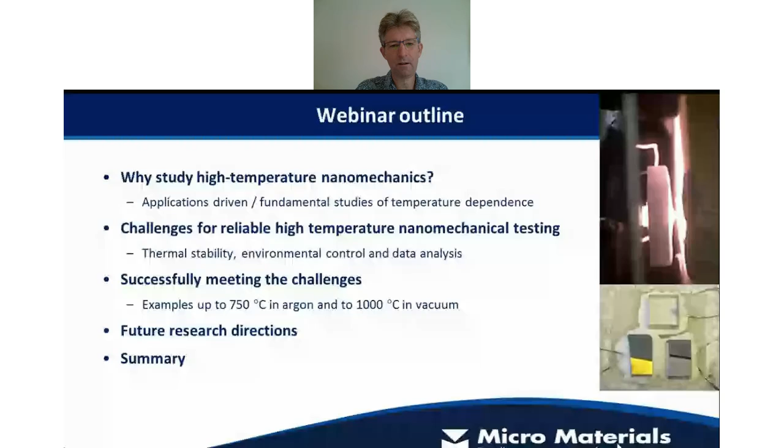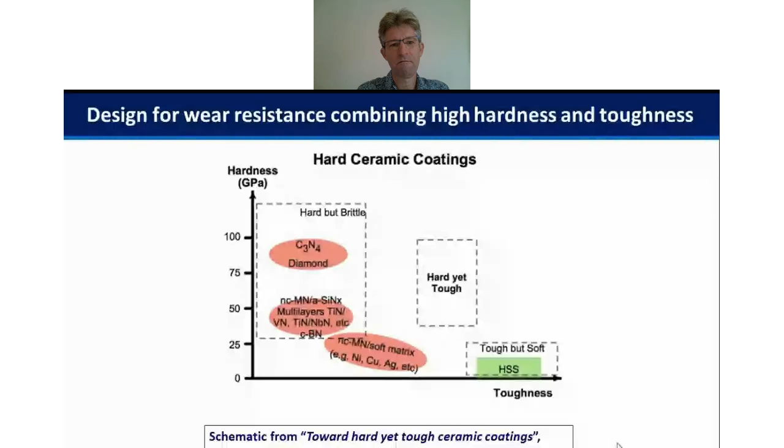This is a schematic, but really, if you think of many applications of these hard ceramic coatings that Sam is thinking about, this is only part of the solution. What we need in these applications is a combination of high temperature hardness and high temperature toughness, which achieves longer life of the coated systems.

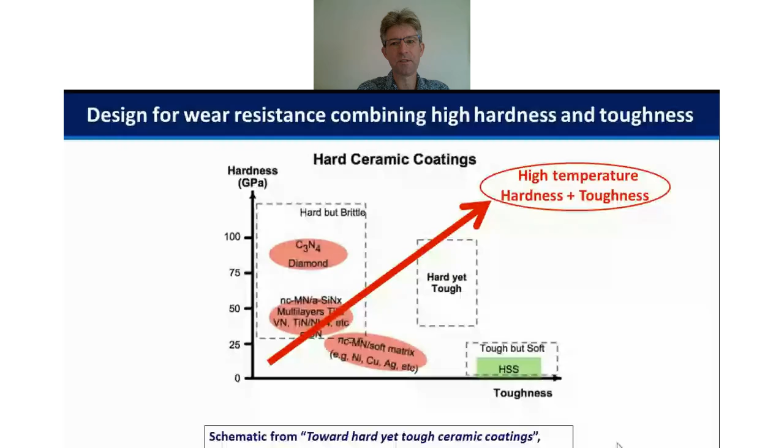A lot of our research revolves around evaluating materials for these extreme conditions. If we think about one particular high temperature application, that is high speed metal cutting, friction is generated during the high speed cutting. So the question might be, how high, what sort of temperatures do you reach?

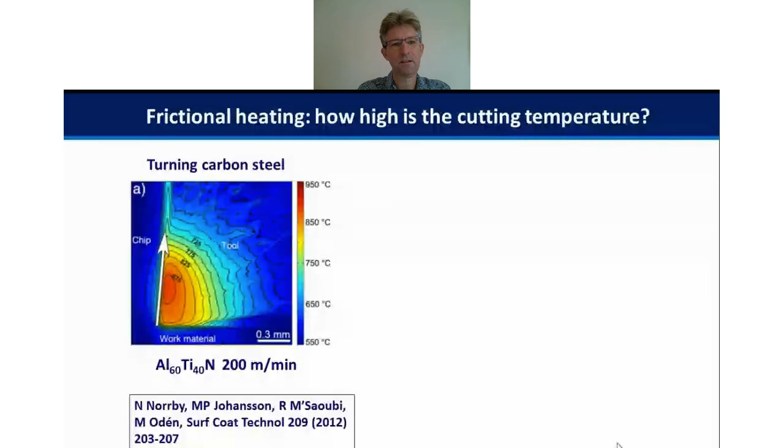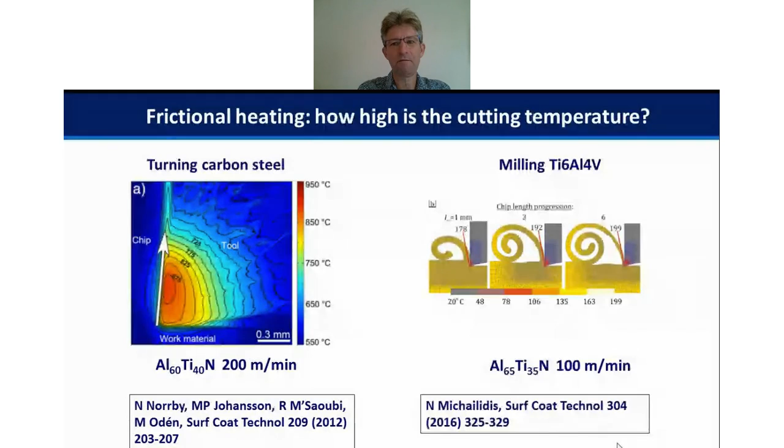If you do a continuous turning operation on a carbon steel, as in this piece of work here, thermal image from Linköping, you can see that you actually achieve very high temperatures around 900 degrees right near the cutting edge in this example. If you have a discontinuous cutting operation, in this case milling of a titanium 6-4 alloy, the temperatures are rather lower, but nevertheless very much higher than room temperature testing.

If we're trying to optimize coating performance for a longer life in these type of cutting tests, the question might be, how relevant are room temperature tests? It's generally assumed that if a coating is hard at room temperature, it stays harder than another coating at high temperatures.

I should also say that in all the graphs that follow, when I put temperature on the x-axis, this really means test temperature. This is not the question of heating the sample up and then cooling it back down and remeasuring after an annealing temperature - this is the temperature we do the test at.

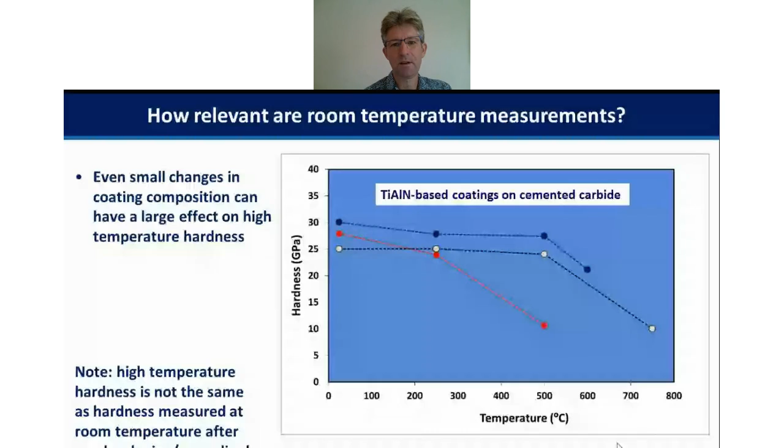So this is a good example here that typically you anneal things to make them harder, but actually when you test them at temperature, the hardness still typically drops.

As well as this type of test where you really need to know the high temperature hardness, there's a wealth of other information you can get out of these nanomechanical tests when you have reliable data. You can get, for example, position sensitive local mechanical property data in different phases.

You can also look at time-dependent deformation and look at things like strain rate sensitivity, creep behavior, and how this is affected by the changing plastic deformation mechanisms in your materials, and that may also affect the amount of pile-up that occurs around the indentation.

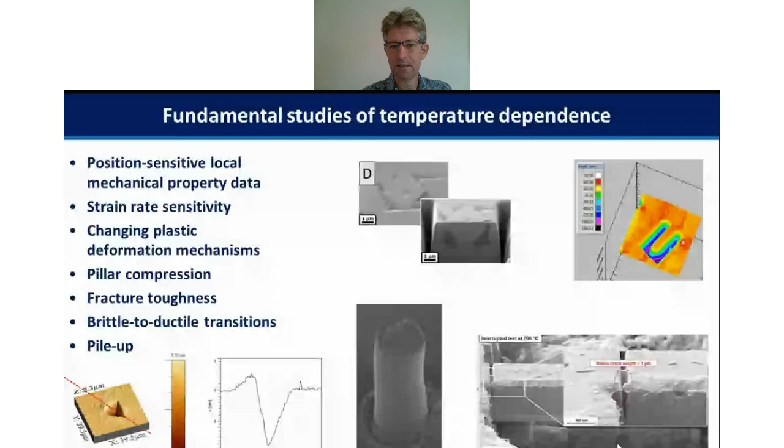You can also look at the ductility of small-scale structures and materials, particularly those that are brittle at room temperature. So you can look at machined pillars, machined micro cantilevers, and I'll talk a little bit about that later on. The examples here are showing silicon cantilevers and silicon pillars, and also a tungsten alloy.

To achieve this very high level of reliable data, you really need to think about three things. Firstly, things around instrumentational stability - the heat, you have to manage the heat flows in the contact generated by the high temperature test.

Make sure that this heat does not reach your measurement electronics and give you some sort of instrument drift for that reason. But equally important, perhaps more important, is that you need to actually control the temperature in the contact to ensure that the probe and the sample are in thermal equilibrium, so that when you do an indentation test, you don't get heat flow as your dominant measurement, so that you actually measure the deformation of the material and not the thermal drift of the contact.

The next set of things you need to worry about are the changing chemical and mechanical properties of the indenter and sample. If you think about the hard indenter material, typically diamond at room temperature, it works really well at high temperature testing up to about 450, maybe 500 degrees, and then it oxidizes in air, putting a pretty hard limit on using diamond above those temperatures. It effectively burns away. You also need to think about chemical reactions between the tip and sample at high temperatures that may not occur at room temperature, and bear that in mind with your indenter choice. You also need to consider the hardness and even the fracture toughness of the indenter material, which again may be very different to what it is at room temperature.

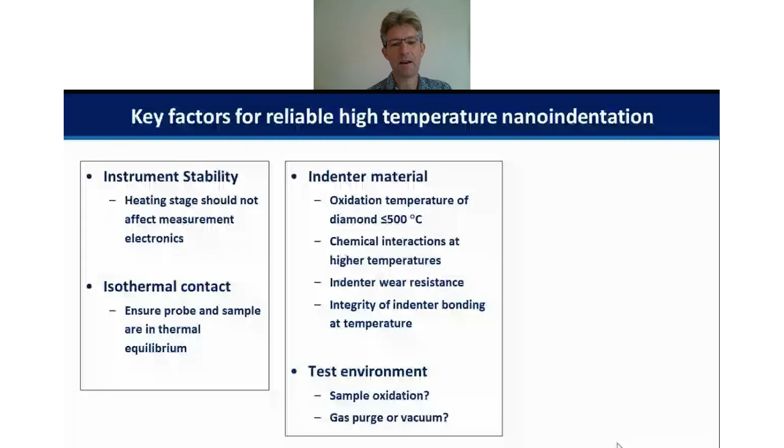You need to make sure the indenter remains well bonded into its holder at high temperature, so you may need to use things such as a very high temperature braze or a glass ceramic bond, as we've done at Micromaterials. Also, the test samples themselves may oxidize, which also impinges on whether you can get away with an argon purge or whether you need to move towards high vacuum.

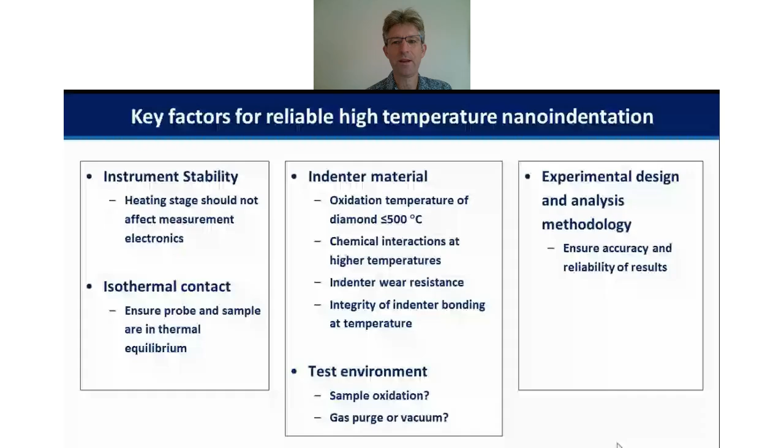The final thing we really need to consider is that in high temperature tests, typically we get a lot more time-dependent deformation, or viscoelastic and viscoplastic deformation, and how we cope with that in the test design and analysis methodology is quite important. I'll give examples of how we can mitigate this to achieve high quality creep data and also high quality elastic modulus data.

Firstly, consider what might happen if we simply have a hot sample and indent it - we might get heat flow. One approach people have looked at is putting the indenter in contact with the sample, leaving it for a certain amount of time so it reaches thermal equilibrium, then doing the test. Some manufacturers have gone down this route, but over the years it's become progressively less popular as it's been realized that it's really ineffective, typically in the large majority of situations, particularly for conductive samples.

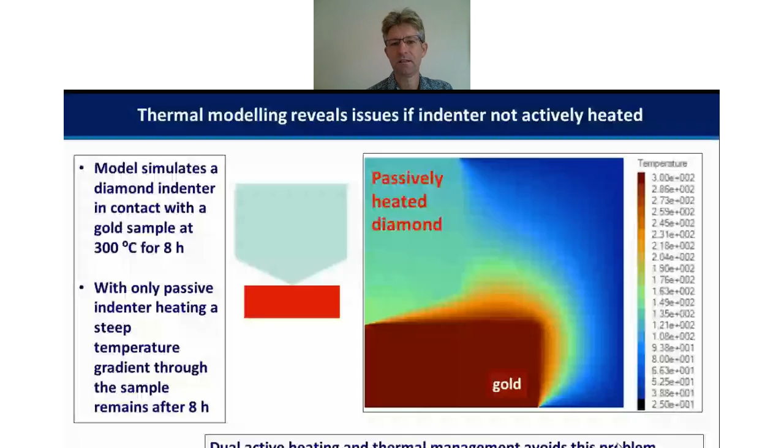The way to avoid it is to actively heat both the tip and the sample, and to precisely make sure those two things are at exactly the same temperature. In the Micromaterials NanoTest system, we achieve that by a combination of things. We have a horizontal loading configuration, which is particularly useful because it allows any heat rising upwards from convection not to reach the displacement measurement electronics. We have separate active heating of the probe and sample, and we've controlled how we thermally match those - we have to handle different thermal masses, with a power lock on the indenter side and a PID loop on the sample side, which stops two PID loops fighting against each other.

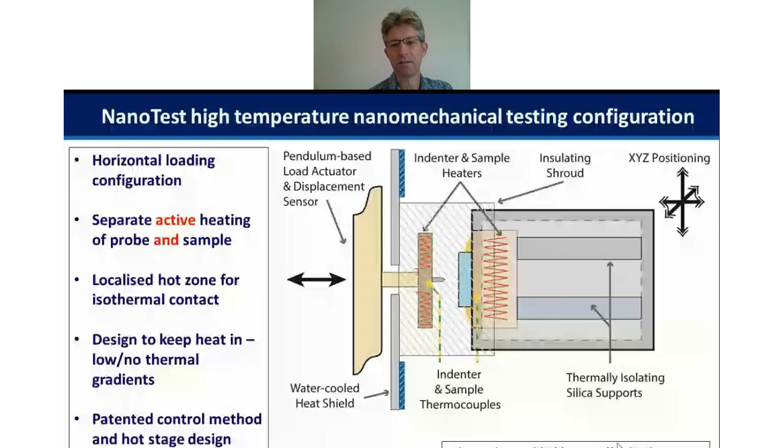We can achieve essentially a very localized hot zone, so if you look at the image where that shroud is, that localized hot zone stays very hot in that area, while outside it, by the shielding and stage design, is essentially much cooler - that's one of the tricks to these measurements. If we look again schematically, if we put a thermocouple on the surface, we can see what the actual test temperature is, and in this example, we've done this in our lab.

We've looked at a test we did at 750 degrees, and we put another thermocouple at the back of the hot stage, and we can see that's about 3 degrees above room temperature, so that's almost exactly the same as room temperature. This is very useful because it means we've really localized that hot zone, and that allows us, amongst other things, to put in an SPM 3D nanopositioning stage, which gives us very fine scale positioning. These things don't like being exposed to high temperatures, but they work quite happily and integrate nicely with hot stages, giving us more power for our high temperature tests.

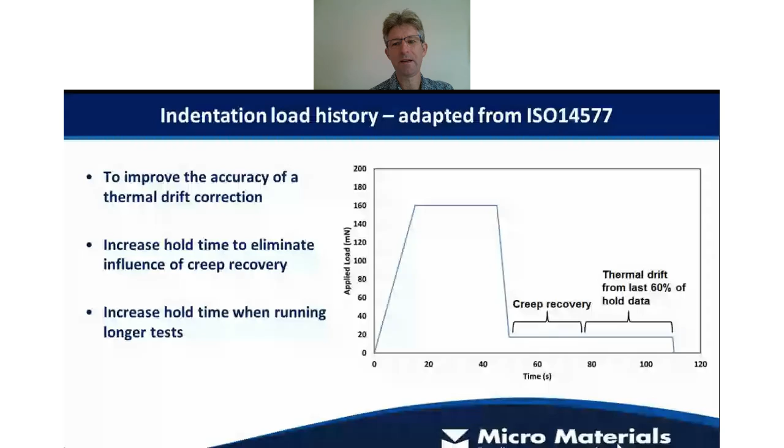We need to be sure that we have minimal thermal drift in our tests. If we look at an ISO 14577 type load history for an indentation test on a metallic material: we load up, we have a hold for creep, the idea being that the creep exhausts, then a relatively rapid unload, and then a long period at 90% unloading where we are essentially measuring thermal drift. The ISO standard says we need to ignore the creep recovery part at the beginning and take thermal drift from the last proportion, typically 60% of that data. So if we have more creep at high temperature, we may need to extend that thermal drift period longer.

This is an example of how it can work. These examples are on a polycrystalline tungsten sample tested in high vacuum. You might think, if I'm getting a measurement, how am I sure it's not creep recovery, and how is it really thermal drift? Well, you can set up tests under different conditions, and if you do that, you can be fairly confident that what you're seeing is actually minimal thermal drift.

If you look at this graphic, in the first 20 seconds or so we're getting a fairly quick depth change, and that's down to the creep recovery in the material. We see that's lower at lower temperature, and it also increases at higher temperature. This is exactly what you'd expect from a materials effect. But if you look at the last part, you can see that's now independent of this loading history and actual test temperature for the last 60%. That gives you a lot of confidence that the thermal drift is minimized in these conditions.

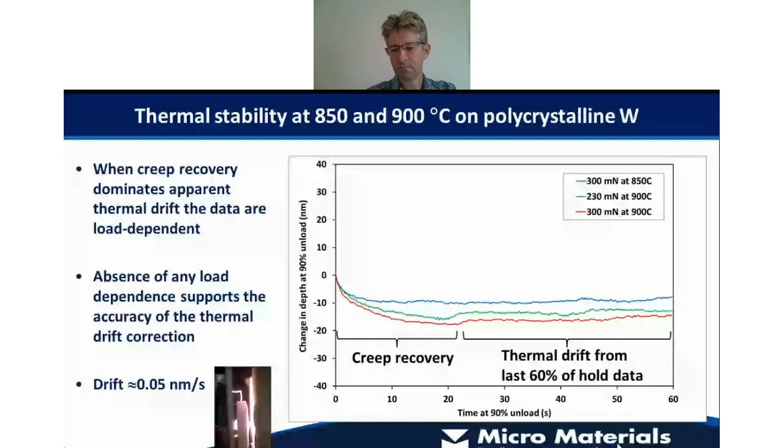In these examples, typically the drift is about 0.05 nanometers per second, which is not quite as good as room temperature, but it's certainly good enough to do high temperature tests. There's a little picture here from a high temperature system at Oxford University, and you can see the tip glows at high temperature, so you've got heating on both sides of that contact.

The next thing we need to worry about, as I mentioned, is the stability of the indenter material itself. Diamond is a very popular choice, and it works very well for high temperature testing, provided you keep the test temperature under about 450 to 500 degrees.

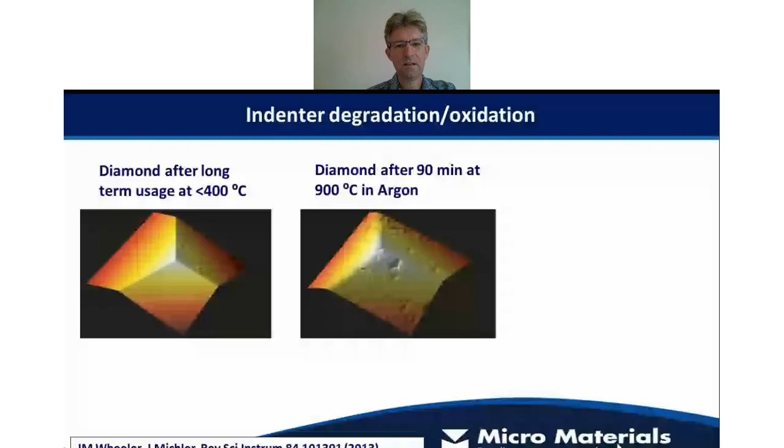This is another image. In this case, this indenter hasn't even been used for high temperature tests, but it has been exposed to argon atmosphere at 900 degrees for about an hour and a half. You can see already you're getting some pitting in that material, and its area function is effectively going to change when you use high temperature tests, making the test data a lot more problematic.

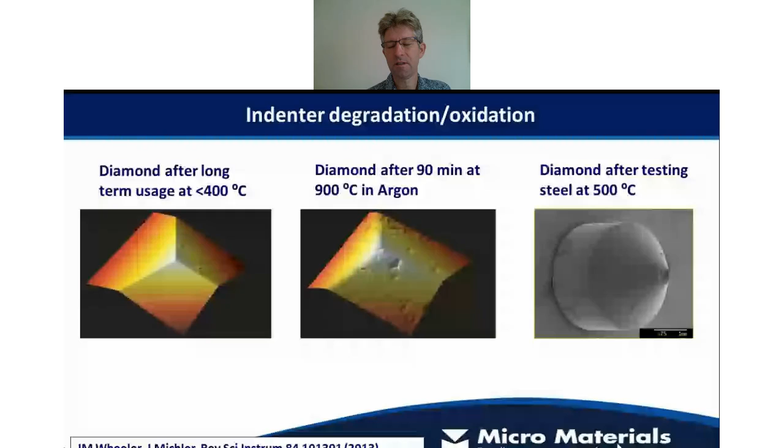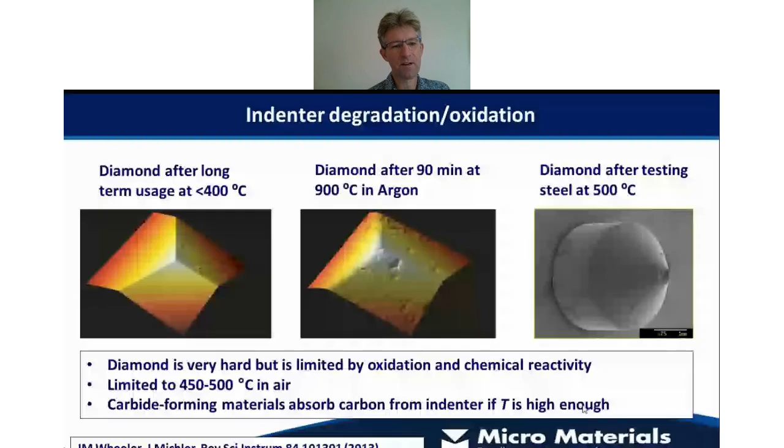The other thing you need to worry about is that diamond itself isn't so effective at testing carbide formers such as steels. This is again another image from Cambridge University, and what you can see is that the top of the tip has essentially been burned away by contact with the steel sample. So we can say that diamond is very good provided you can keep the temperature down, but you really can't use it for testing carbide forming materials at high temperatures.

So it is, as I say, quite a successful material.

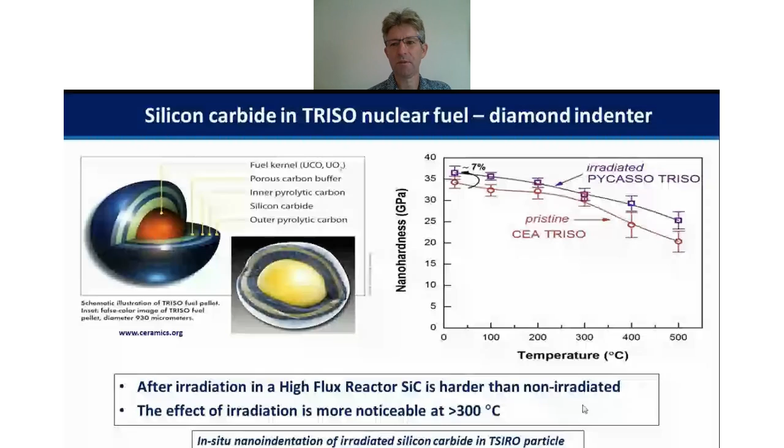This is an example using diamond as an indenter from Manchester University, where they've tested a so-called Triso nuclear fuel pellet, specifically the silicon carbide layer, and looked at the effect of irradiating it to simulate what might happen in a nuclear reactor. You can see that you can effectively get reasonable mechanical property data across that temperature range up to 500, and you see a softening without any particular increase in data spread.

We also need to worry about not just the indenter but also the sample. I particularly like this picture, from Frank Lofaj, of a cemented carbide insert that has just been exposed to an 800 degree air environment, or possibly a pure oxygen environment. You can see the square cutting tool insert with rounded corners before testing, and the rather dramatic shape change that occurs due to swelling and formation of tungsten trioxide.

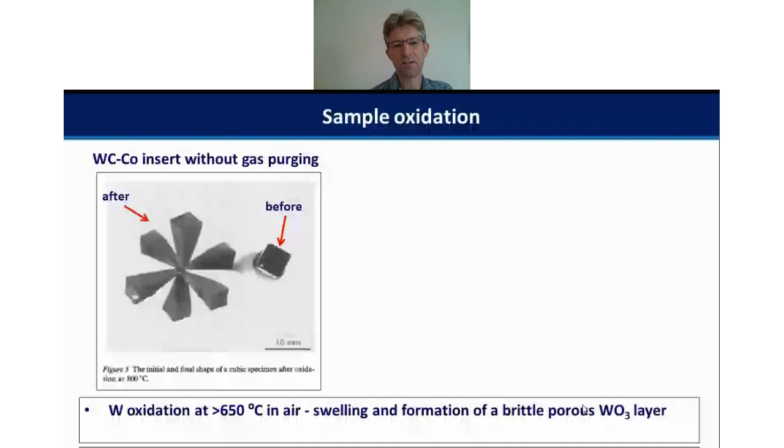Even though such extreme things don't necessarily happen in nanomechanical testing, it's still something you need to worry about. It's not really possible to test once oxidation occurs, because essentially then you're testing the oxide properties and not the properties of what is underneath.

One way around this is to test in an argon environment, using a cubic boron nitride indenter - this is work from Lund University in Sweden. You can see that in this case the error bars are actually slightly better at high temperature than at room temperature, so there are no problems at all. Here, up to about 700 or 725 is probably the limit for that application.

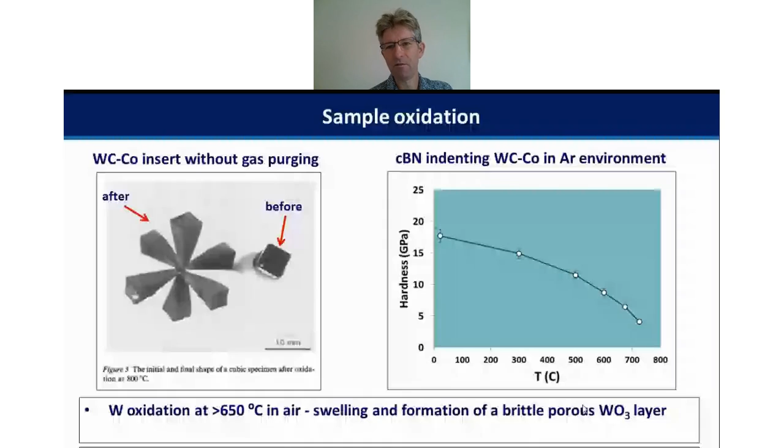This combination of using a hard cubic boron nitride indenter and an argon purged gas environment is quite successful at testing a wide range of other materials as well.

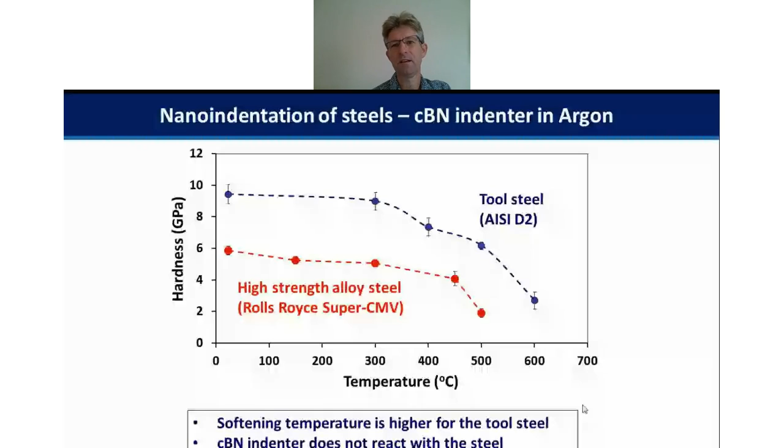For example, we can contrast the high temperature properties of a high strength alloy steel developed by Rolls-Royce and the standard D2 tool steel. We can see the softening temperatures change, and the error bars remain low throughout that temperature range. We don't have the same problems with the CBN indenter and steel as we do when testing steel with diamond, so CBN is the preferred choice for steel.

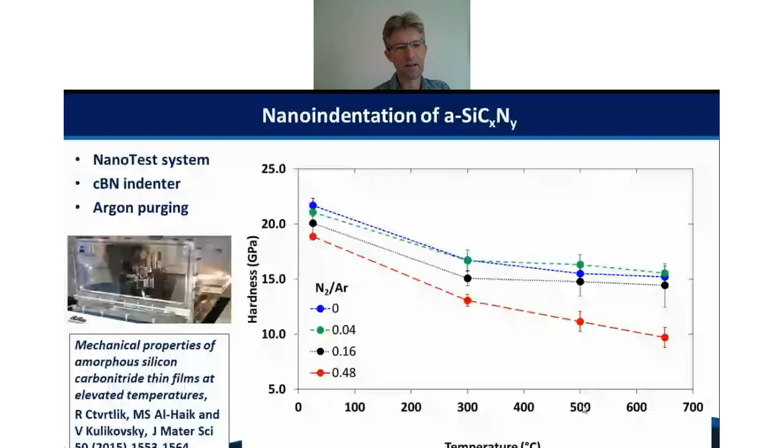On the little graphic on the left, you can see an example of one of the instruments sitting in an environmental chamber.

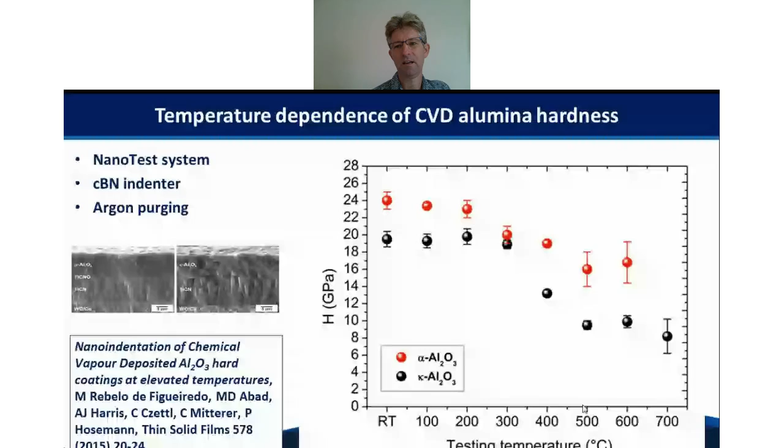Another example where this combination of the nanotest with cubic boron nitride indenter and argon purging has been used to look at mechanical properties versus temperature for two different types of cutting tool material, differing in having an alpha or a kappa alumina top layer. The alpha alumina remains harder throughout the temperature range. There's a little variability in some of the data, but it typically remains pretty good, and this is quite useful in explaining the tool life data.

Hardness is important for tool life data, but in many tribological applications, composite parameters such as the hardness to modulus ratio - a measure of the elastic strain to break - and the h cubed over e squared parameter, which relates to the resistance to plastic deformation, can be particularly useful predictors of tribological performance.

We can work out not necessarily very high values, but the optimum values of these things for different tool life in different applications. On the left there, a few different examples of PVD and CVD coating systems show the H/E ratio changing as a function of temperature.

In determining this, I should say, a little out of order, that we need to account for the changing elastic properties of the indenter as well, which changes very slightly.

The CBN indenter changes very slightly over that temperature range, and we can also see on the right that the parameter h cubed over e squared has a much stronger temperature dependency than h/e. So when we're using room temperature, we're saying it correlates with tool life, but actually what we need to be doing largely is looking at the high temperature behavior, and it's quite different at high temperature for this.

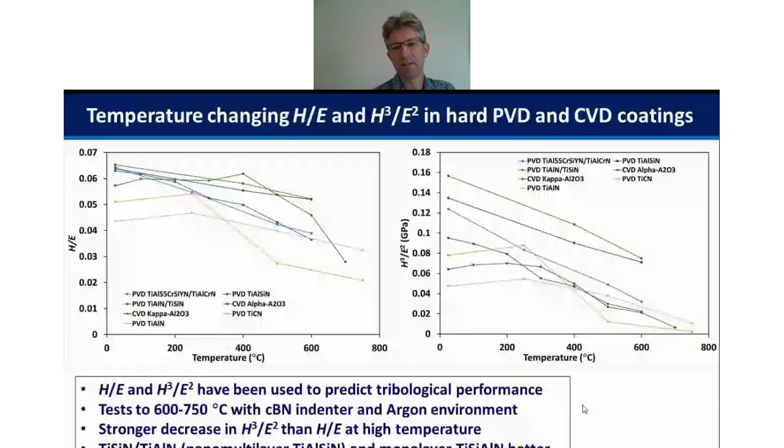What we can see in this case is that a multi-layer nanolaminate titanium aluminium silicon nitride system, the brown curve there, really has the best performance at high temperature, and this actually fits with its high temperature tribological data in many applications.

So we test these materials with CBN, and this has been fine typically over the years, but as coating designers have got better, we're worrying a little bit about the wear of the CBN indenter. So what we're asking particularly is, is the indenter hard enough at high temperature?

Diamond's hardness typically drops, but not too much. Other materials typically have lower hardness, and the hardness drops as temperature increases. This can become a potential issue if we're testing hard coatings that remain with appreciable hardness at high temperature.

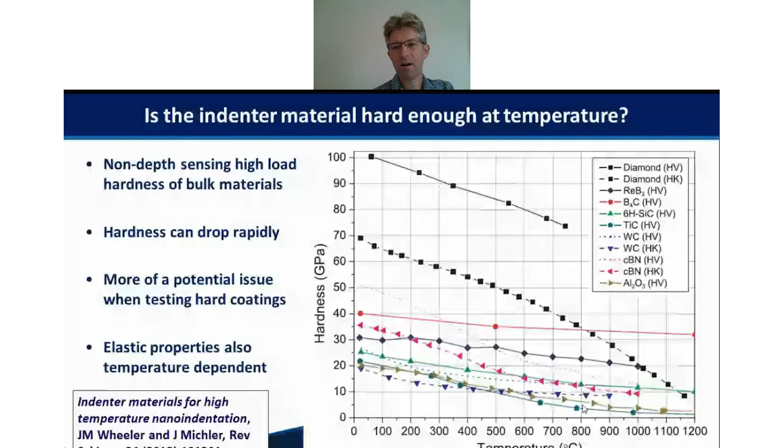With this in mind, there has been a real search for different high temperature indenter materials, and some of the things people have looked at, for example, are cemented carbides.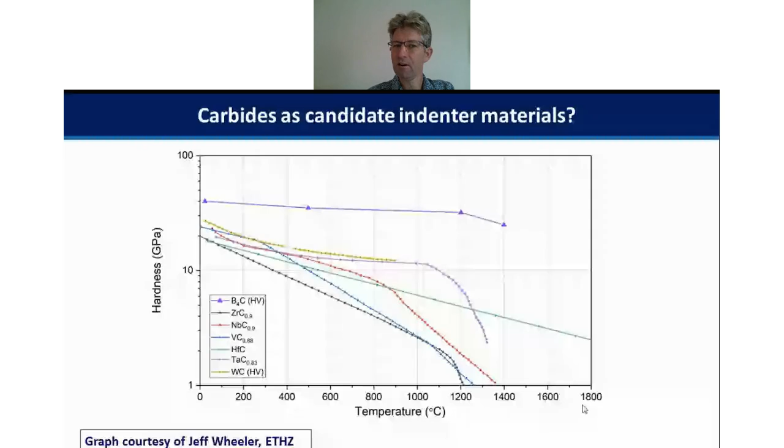You can see which of these carbides might be useful for further exploring. Boron carbide is particularly promising, but there's not much of it about, so we're looking at other materials.

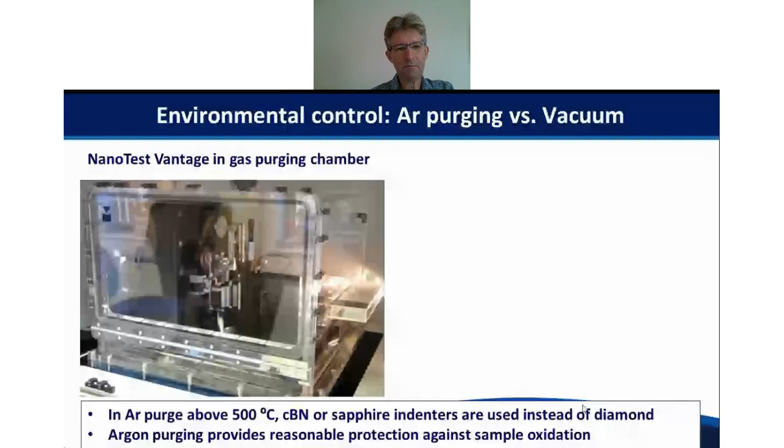So up until now, I've been talking about controlling, basically eliminating almost all the oxygen with an argon purge. This is particularly effective in most cases, and if we want to test over 500, we combine it with testing with CBN indenters. For some materials, particularly superalloys, we use sapphire indenters instead to avoid chemical reaction, and it's a particularly effective solution in most cases.

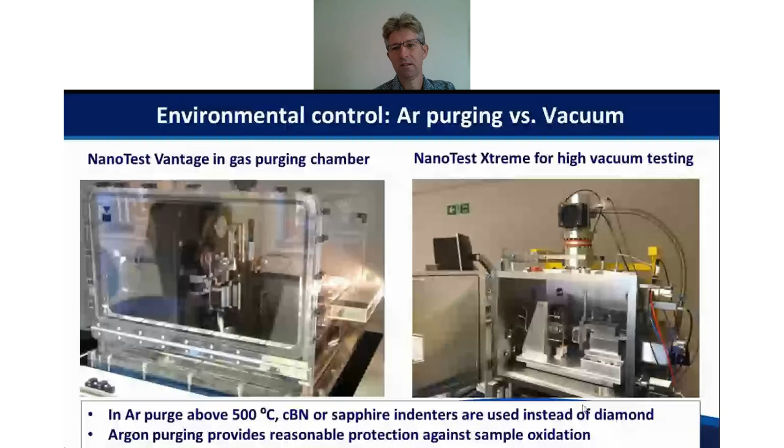But in some cases we need to go towards high vacuum, because we really need to have no oxygen there at all. This is an example on the right showing a NanoTest Xtreme. The inside design is a little bit different to allow for this high temperature testing in vacuum, and this really can negate any sample and indenter oxidation issues.

One particular application of this, and it's particularly timely now since Tuesday the construction started on the ITER fusion reactor in south of France, tungsten has been used in these as a plasma facing material. In this application, the tungsten components are subjected to irradiation damage, and a lot of research is based around trying to simulate that type of damage with ion beams.

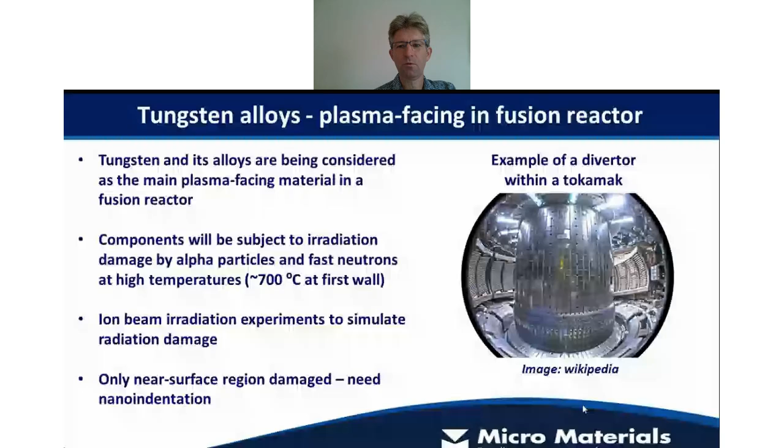In this case, the samples are not radioactive. The damage is restricted to a few microns within the surface, and we can test these in nanoindenters. It's really a good way to simulate the radiation damage caused by alpha particles and fast neutrons.

The problem is, though, that if we're trying to test in argon, the tungsten sample oxidizes too fast, and you get formation of this thick tungsten trioxide layer, as we can see. At room temperature it's not a problem, because there's a native oxide, but it's very thin, and essentially we don't see that in the indentation data. But at high temperature it's really thick and porous.

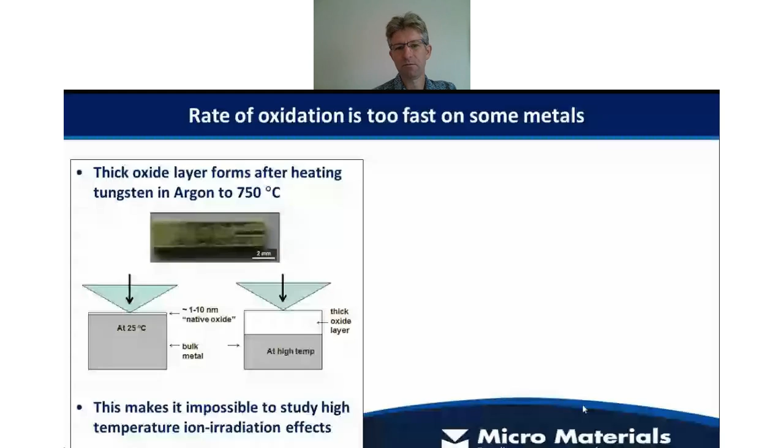The next thing that we need to worry about is the enhanced time-dependent deformation that we see at high temperatures. This is an example on a polycrystalline tungsten sample, with data taken in high vacuum. In the temperature range of 750 to 950 degrees, interestingly, this material doesn't particularly soften over that range—the loading curves are almost superimposed.

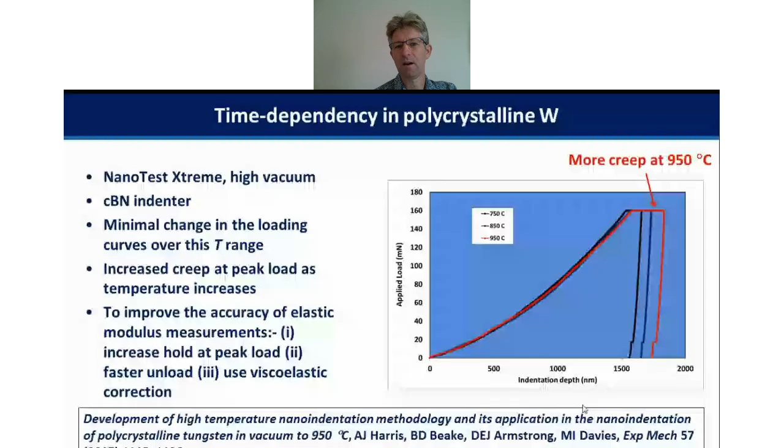But what we do see is greatly enhanced creep during the hold period at peak load. We need to take that into account if we want accurate elastic modulus measurements from the unloading curve. The various strategies to do that involve increasing the hold time at peak load, unloading more quickly, or using a viscoelastic or other analytical analysis.

This reminds me of another example: G18, a glass ceramic seal material used in solid oxide fuel cells. This material is quite creep resistant up to about 550 degrees, but above 550 degrees it's really susceptible to high rates of creep. I illustrated that with the red curve, and you can see that high rate of creep is retained at the end of the hold period.

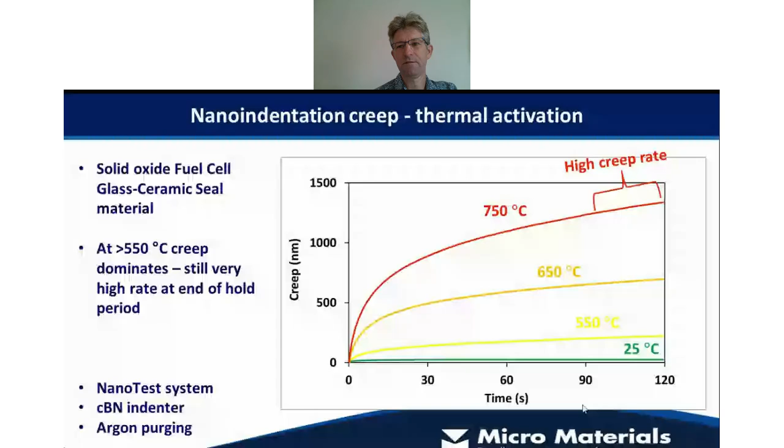So you can imagine that creep rate continues as you unload, and it's affecting the contact stiffness. This is a headache for nanoindentation data, and we need to handle this either analytically or otherwise get around it if we want accurate elastic modulus measurements.

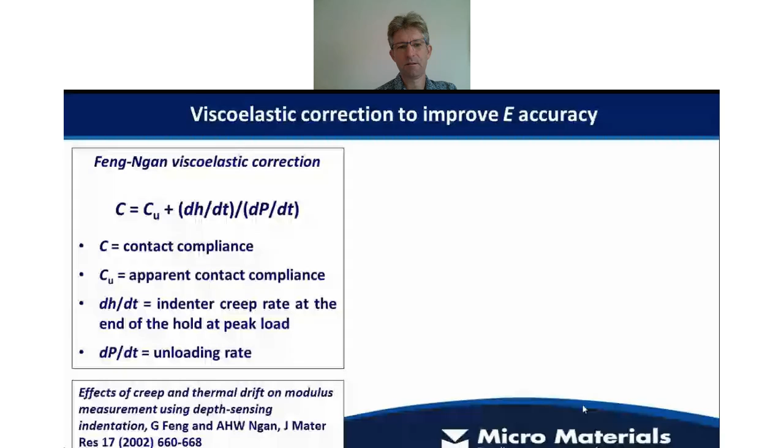One of the things we've done is apply a viscoelastic correction originally designed by Feng and Ngan for room temperature tests, shown mathematically there in terms of compliance, not stiffness. What we can see is that this type of correction allows us to effectively correct the unloading stiffness we observe with anelastic deformation occurring within it, to get back to what the real value would be without that anelastic or viscoelastic deformation.

Here's some data from 2008 on CMSX4, a popular nickel-based superalloy. We can see that its hardness doesn't particularly drop at high temperature, so the loading curves almost completely superimpose. If we look at the blue unloading curve, it apparently stiffens up at high temperature, but in fact this is an artifact due to anelastic deformation—it's not a bow you see, but a slight stiffening.

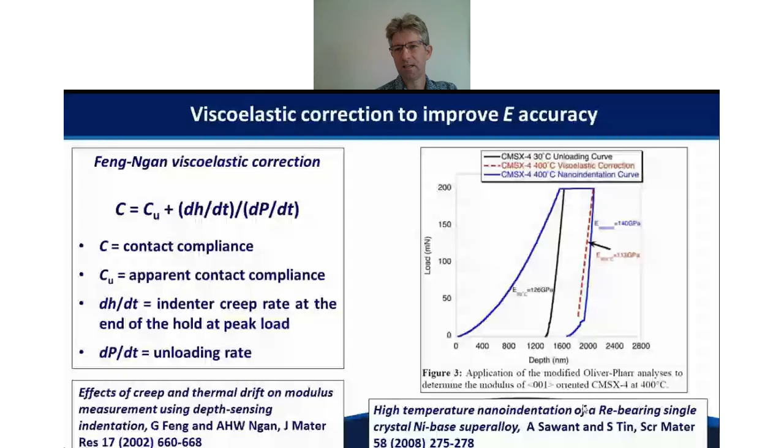If you analytically allow for that, you get data showing that in this case the elastic modulus drops from 126 to 113 GPa, which is exactly what the literature said it would do. These tests were done with diamond, which was possible because it was under the 500 degree limit.

Obviously, the applications of these nickel-based superalloys and their bond coats in jet engines go far higher than this. So it's nice to be able to test at higher temperatures, and for that you need to go to vacuum and use sapphire indenters, because cubic boron nitride indenters react with these samples and effectively blunt the tip, changing the area function too quickly.

But sapphire indenters work well, and this is some work from Aachen—thank you very much to Sandra Korte for supplying this slide. What we can see here is the bond coat, the MCrAlY bond coat between the thermal barrier coating and the superalloy substrate.

This is looking at the creep that occurs in 30 seconds, and we can see at 500 degrees it's actually very creep resistant—the creep is, if anything, slightly less than at room temperature. But at higher temperatures you can see very high creep, and this limits its application temperature.

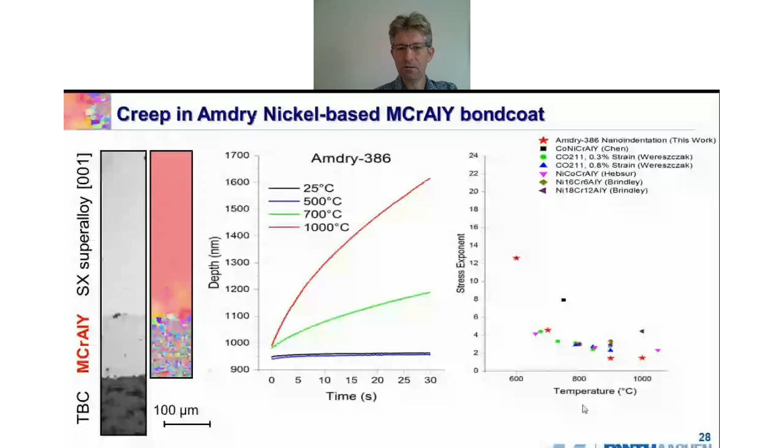If you look at creep analysis and stress exponents from that, you can see the little stars correlate quite nicely with what you see from macroscale tests.

Also at Aachen, they've extended this work using their NanoTest Xtreme to do tests in high vacuum with a sapphire indenter on both the bond coat and the superalloy substrate. We can see that the mechanical properties are reasonably similar.

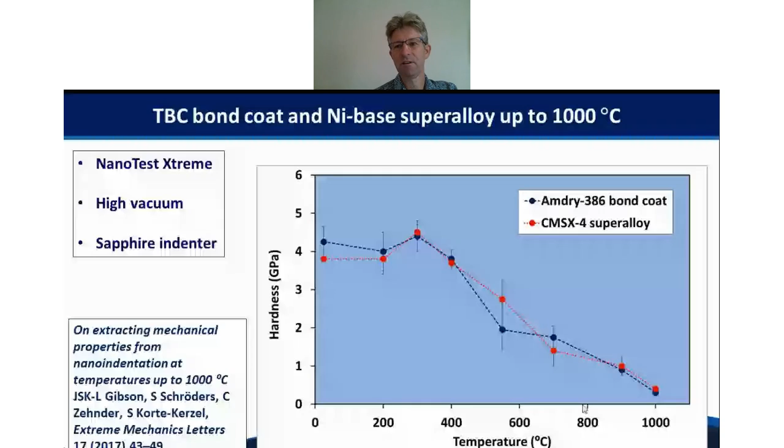The superalloy substrate softens less quickly typically than the bond coat, but nevertheless it's quite consistent data. That's the first time in the world that we've been able to use nanoindentation to reach 1,000 degrees and get highly quantitative data throughout that temperature range. So they should be applauded for that.

So as we go to higher temperatures, the critical issues, provided we have a stable system—and in NanoTest Xtreme we have a particularly thermally stable system—we don't really need to worry about thermal drift particularly. Then the remaining critical issues are really material dependent.

These split typically into potential problems with indenter wear for hard coatings, and for metallic alloy systems we typically need to do testing under high vacuum to eliminate oxidation. We need to consider various tip-sample reactions that may be more likely at higher temperature, and account for this higher level of time dependency when planning our indentation tests and analysis.

Over the years we've built up a database of experience in how we design this type of test. Going forward, I think there's going to be increasing use of certified high temperature reference materials with known elastic properties at high temperatures. We can use these particularly in our high temperature campaigns, and test them to provide an indirect verification of the tip shape area function at high temperature, to check we have no wear—giving extra data assurance of the high temperature results.

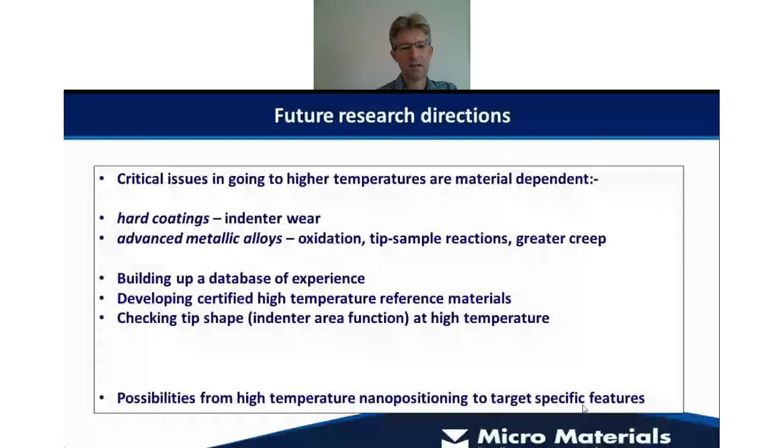Lastly, we can look at doing some clever things with high temperature nanopositioning to target specific features in the material. But before I talk about that, I just thought I'd show this schematic again.

Thank you very much to Jeff for this one. It's quite an informative graphic, because it shows essentially the increasing peak temperature with time.

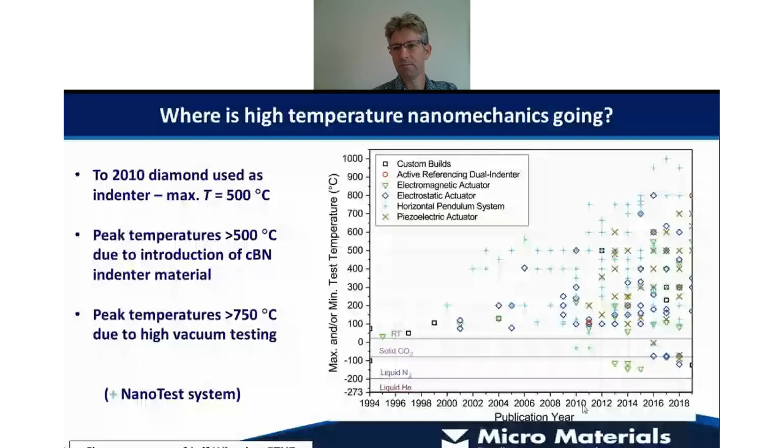What we can see typically is that up until about 2010, the maximum temperature in these studies was around 500 degrees, because diamond was used as the indenter. Then just after that, CBN indenters were introduced, allowing people to reach higher temperatures, up to about 750 or 800 degrees. Since then, we're able to achieve 950 and 1,000 degrees with testing in high vacuum. In this case, the plus symbols are the NanoTest Xtreme and Vantage systems.

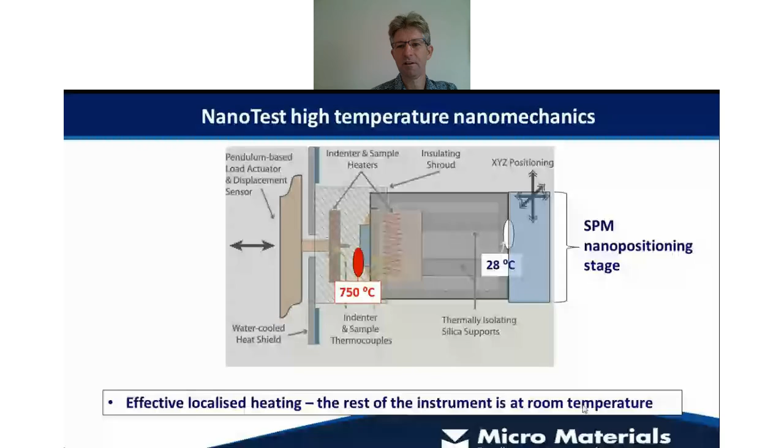So I showed you the schematic earlier, and mentioned the possibility to mount the hot stage on a nanopositioning stage. Many of our systems have this configuration, and this allows us to use that nanopositioning stage to very accurately target our indentations or other types of nanomechanical tests.

This is an example from the National Physical Laboratory here in the UK, where they've used this high temperature nanopositioning to precisely indent specific grains in this multi-phase material.

In this case it's a cemented carbide, tungsten carbide cobalt material, with a mix of basal grains and two different prismatic orientation grains. What we can see essentially is that all of those properties change differently as a function of temperature, so we have the ability to get the temperature sensitivity of the individual phases in the material now.

Again, for convenience they've used diamond at the lower temperatures, and then above 400 degrees you can see it seamlessly switches, and they switch quite happily to use a CBN indenter.

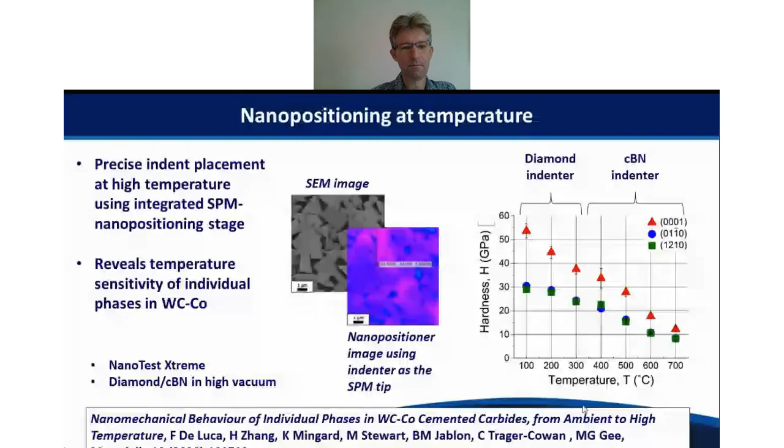We can use that image to very precisely target where we want to do our bending test. That's very important, because it then goes into the maths to determine things such as the yield stress and modulus at temperature.

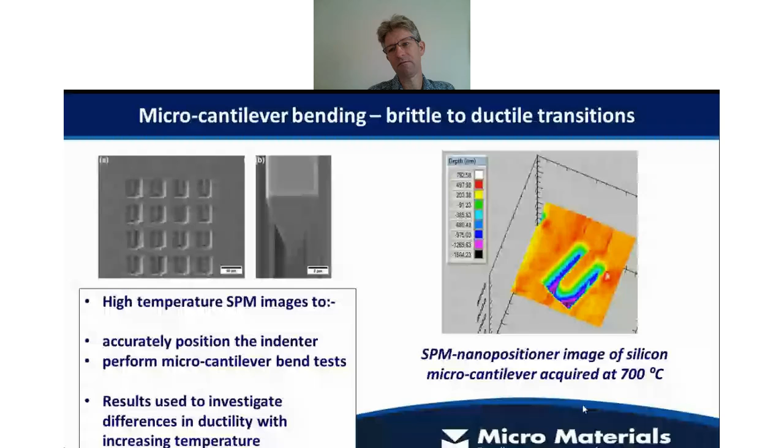We can also look at things like the differences in ductility with increasing temperature, and we get very nice images. This is effectively a high temperature SPM image, with the integrated nanopositioner, taken at 700 degrees on a micro cantilever machined in a silicon surface.

When they did these tests at Oxford University, they were able to pull out differences in elasticity, but also differences in ductility.

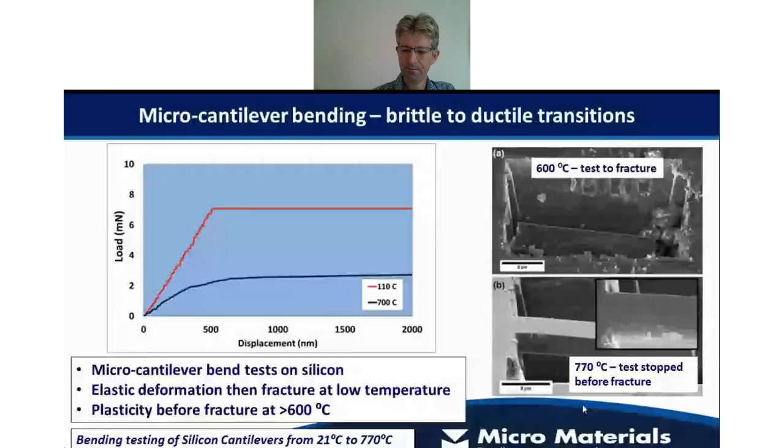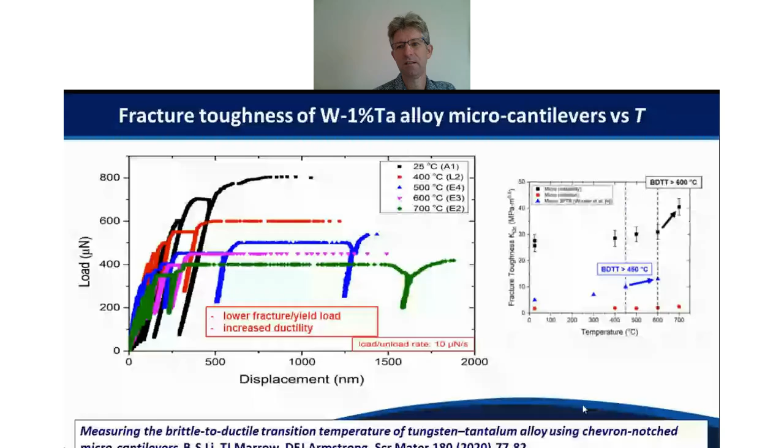Another more recent example from the University of Oxford: Bo-Shiuan Li and Dave Armstrong have been looking at multi-cycle tests as a way to pull out fracture toughness tests, in this case on machined micro-cantilevers of tungsten with 1% tantalum. Using this approach, you can quite nicely pull out differences in fracture toughness that relate to the onset of the brittle ductile transition temperature.

To summarize, I hope I've given you some examples showing how important it is to be able to do these tests at high temperatures, and how it can provide much more relevant characterization of the mechanical properties of materials when they need to operate in extreme high temperature environments.

So reliable data is possible with care. You need to minimize or avoid thermal drift through accurate temperature matching, and active control of the tip and sample heating to get a constant temperature in the contact zone, so-called isothermal contact. We need to avoid indenter-sample reactions and oxidation through accurate environmental control, consider indenter blunting, and account for any time-dependent deformation in how we set up the test and how we do the analysis to mitigate this.

It's not just hardness and elastic modulus - as I said, you get a wealth of other information from all the other different mechanical tests you can do now at high temperature. These results are really helping us improve our understanding of the links between microstructure and mechanical properties and performance of materials in these environments.

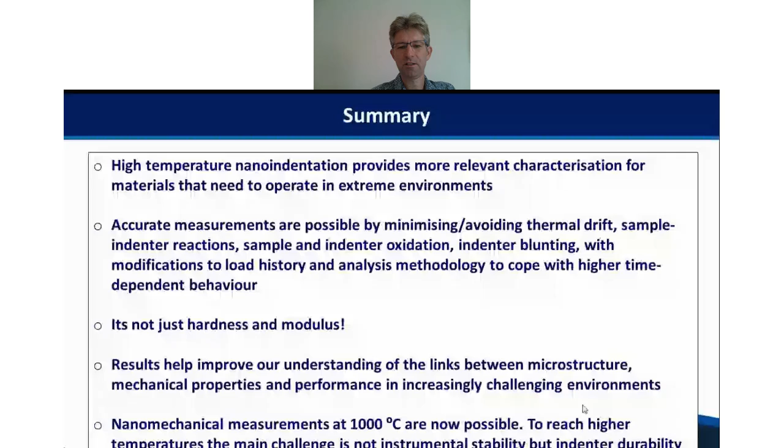So nanomechanical properties at 1,000 degrees or higher are now perfectly possible. To reach high temperatures, one of the main challenges is certainly to develop indenter materials of enhanced durability - that's a key area of research.

I'd just like to finish by acknowledging my colleagues and other collaborators, and thank you very much to the guys on the left for supplying some of the slides as well. Also, for further reading, if you see on the right, the publication at the top is a short review which describes many of the studies I've talked about in this presentation. The one in the middle is the first example of reaching 1,000 degrees, a very interesting article again by Aachen. And a little bit further ago, Jeff Wheeler and Johann Michler's paper on indenter materials is also well worth a read.

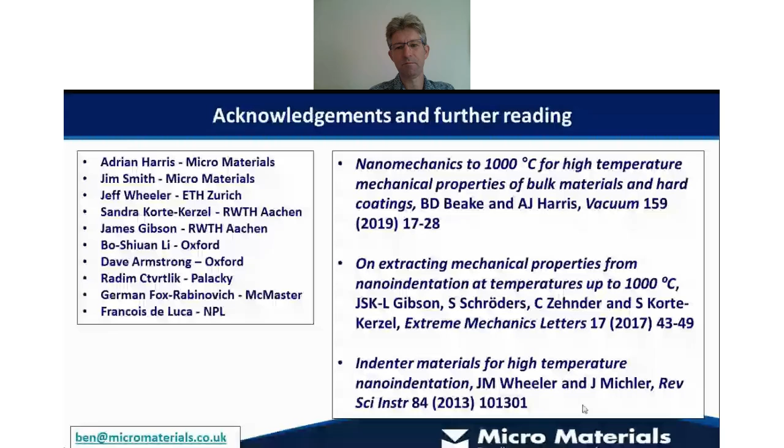Okay, thank you very much.